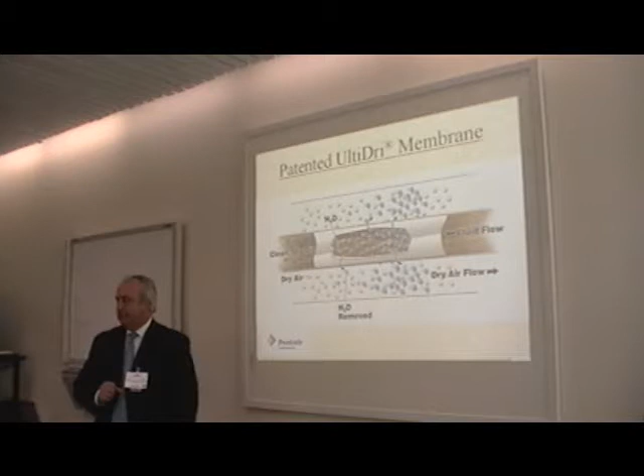We typically, the onboard filtration is between 1 and 6 micron, so you most likely have a pre-filter. Right, but essentially, if you're under a 20 micron or 50 micron particle, it's not going to hang up in there, it will go down. There is a concern that if particles start damaging the surface, you're going to interfere with the moisture exchange rates.

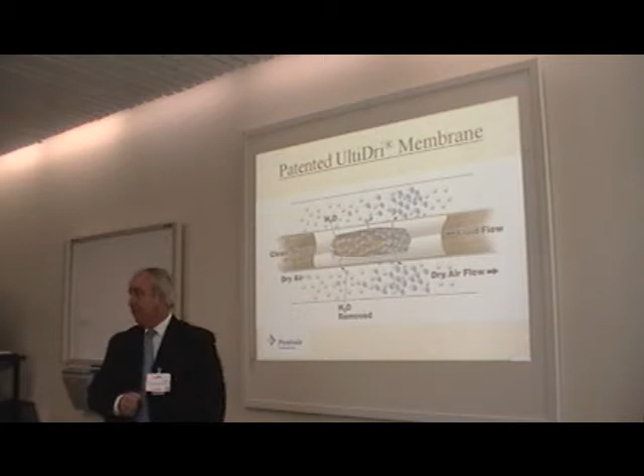That's part of why we've built a pre-filter right into the skid. We like to call it a very simple, very elegant solution that takes all the complexity of things like vacuum purifiers and centrifuges out. We've developed a very technical dehydration contactor that goes in the middle, and that drives the whole process.

So we've got a cutaway view of how the system works here. I think I already covered all these.

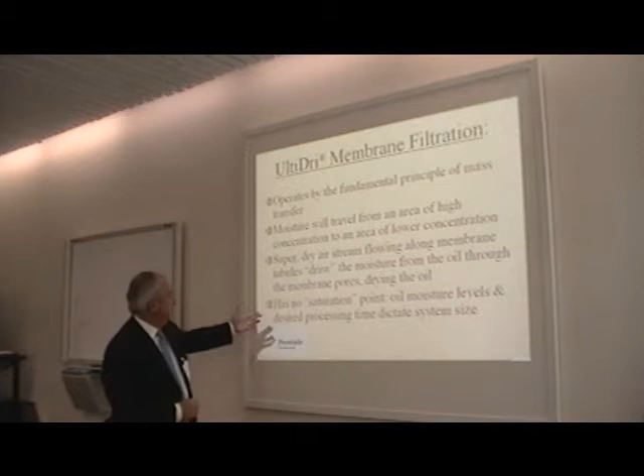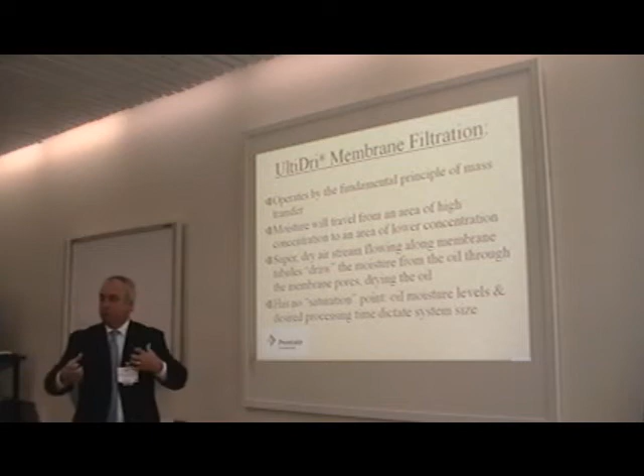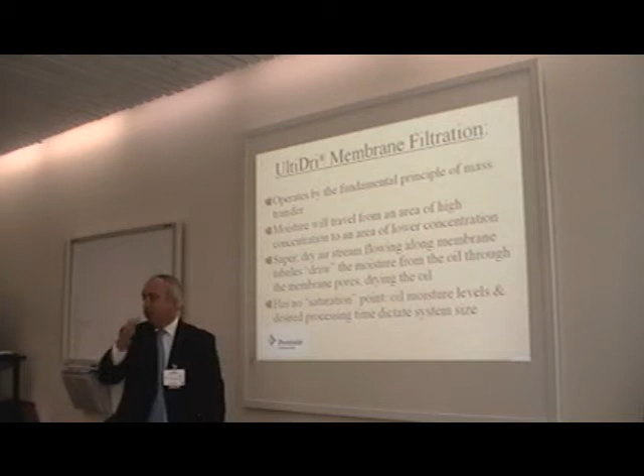One thing that's interesting, we talked about saturation point a little bit. There's no concern with that with us. Essentially, the greater the differential between the moisture in the air and the moisture in the oil, the greater the rate of exchange. That's why if you have a system that upsets periodically, like that other power plant example, every time they change load this thing will take out that moisture when it loaded up. The rate of water removal is 10 times higher than when it gets down to 100 ppm again. So it goes up with the concentration.

Diffusion, yes, that's all it is.

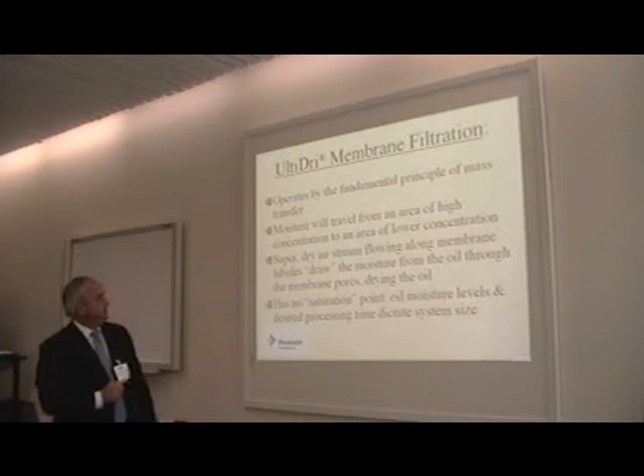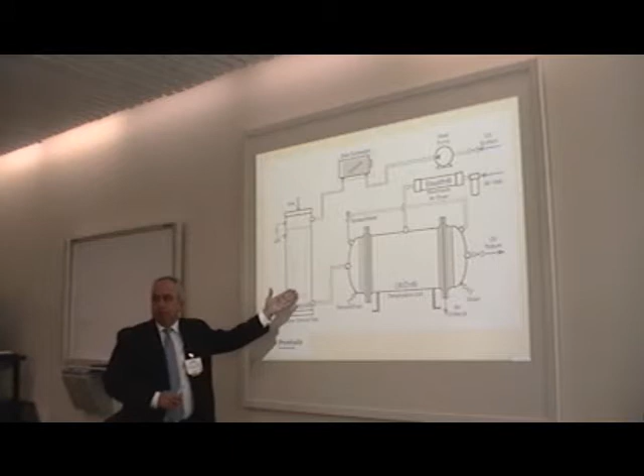First thing it sees on the skid is a particle filter, and this one, like I said, you can adjust it to meet your needs. What we recommend is the flow rate challenge on this filter is very low compared to your full flow filters. This filter's got enough surface area to handle 200 or 300 gallons a minute of oil, but we're going to give it 8 to 16 or 30 gallons a minute. Because of that, there's no load challenge on the filter. It's got what we call a low flux rate, which is flow rate per unit area.

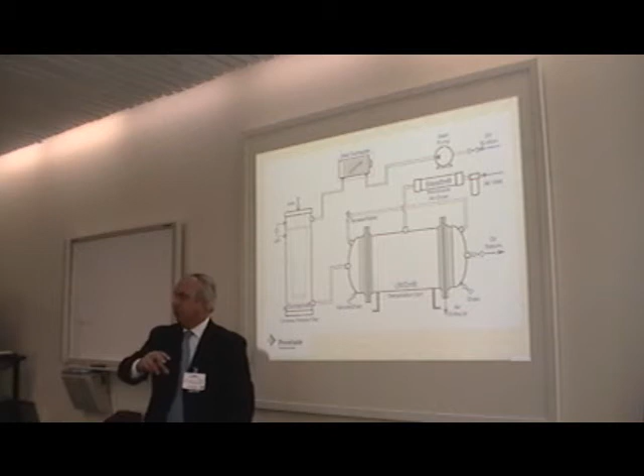Power plants, maybe 6 micron, maybe 12, we can go to that level. The paper mill in that example went to 1 micron. Why not? They can afford to do it that way. So essentially, we're removing all the solid contaminants.

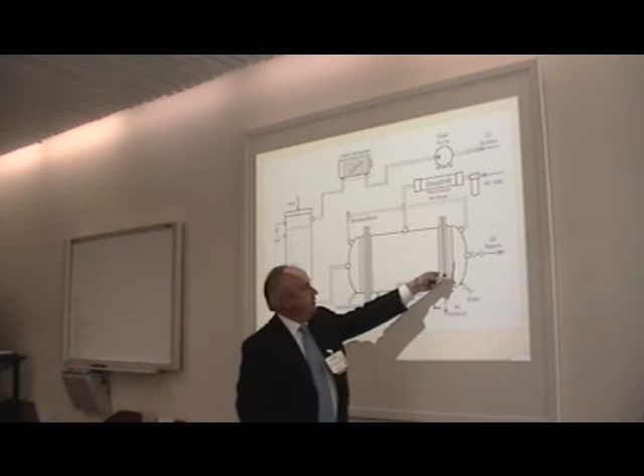The oil then flows into the dehydration housing, which is essentially a horizontal housing. It could hold either 1, 3, 7, or 14 of those modules in parallel. Depending on how much dehydration capacity or oil capacity you have, you scale it up and down as needed. The oil then basically goes in one end of the contactor, out the other, and back to the reservoir.

Then on the inlet side, we're taking plant air. We make what's called a stealth air dryer, which is essentially a hollow fiber membrane as well, a point-of-use membrane air dryer. We'll take plant air, and we try to work with process air as opposed to instrument air because of cost issues. So we'll take process air, dehydrate it down to 40 below with an air dryer, and then introduce it into the system. Since the air goes in completely dry, it actually comes out really dry.

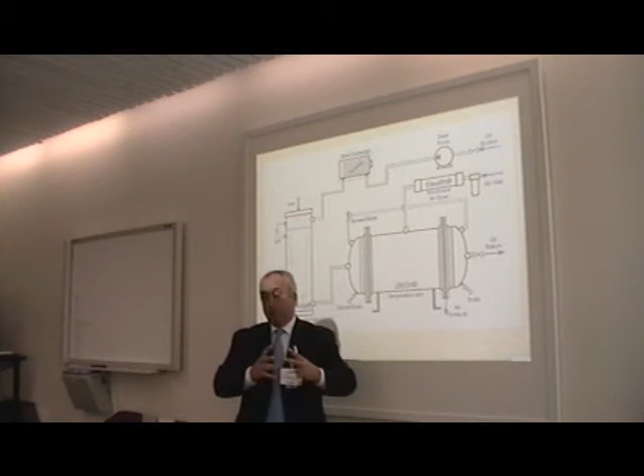It went in at a 40 below dew point. When the oil is getting cleaned down to, say, 50 parts per million water left, down to the discrete dissolved level, the amount of moisture coming out of the air is extremely low. So it comes in at -40, it might come out at -25. You can vent that right in the room. Until you get up to +60, you're not going to condense water. So it essentially is dry air, so you can just let it go.

The one thing we don't show here is built into the base of the pre-filter housing is an online moisture probe. It measures, using capacitance, the level of dissolved moisture in the oil. That gives you a local PLC reading telling you you're at 50% of saturation, 20%, or 100%, along with the temperature of the oil at any given moment.

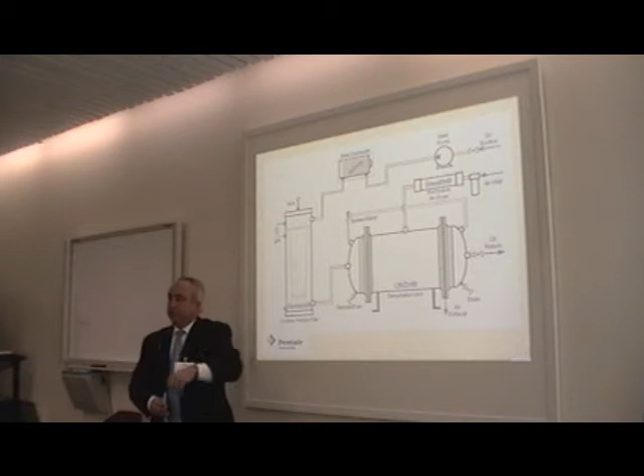We use that to help people tailor how much air they're burning. If you know you've upset the system and the meter says you're saturated, you turn up the air regulator on the inlet to full flow, letting more air through to do more dehydration. As the oil starts to dry and you get down to 50% saturation, you're wasting air, so you cut back. Get down to 20%, cut it way back. Essentially we use that to tailor how much you're using.

For that part of the monitor, how low can you go with this capacitive measurement? 10% is probably getting down towards its visibility threshold.

Would it be desirable to go lower? If there's a means of helping you get it down to really low, would that be of some benefit? I think the people in the room would answer that better than we would. Personally, I don't know how critical that is to them. The challenge is we're looking at an instrument that we haven't calibrated the curve for, for some people, to say if you're at 40% that means 80 ppm or whatever it really is. You actually have to calibrate it for every single oil, so that's a real nuisance on our end. If someone's running a really premium plant, yeah, I could see that they really want to know that.

There is a parallel technology to what I presented this morning that can measure moisture in parts per billion, in oil. That might be interesting.

I don't know if it fits into this product, but it's a fiber.

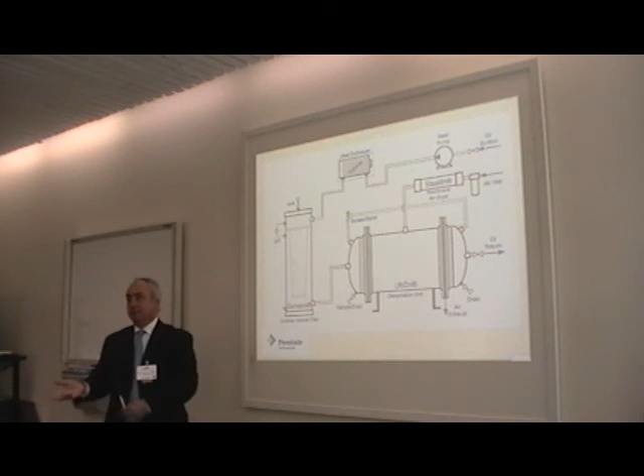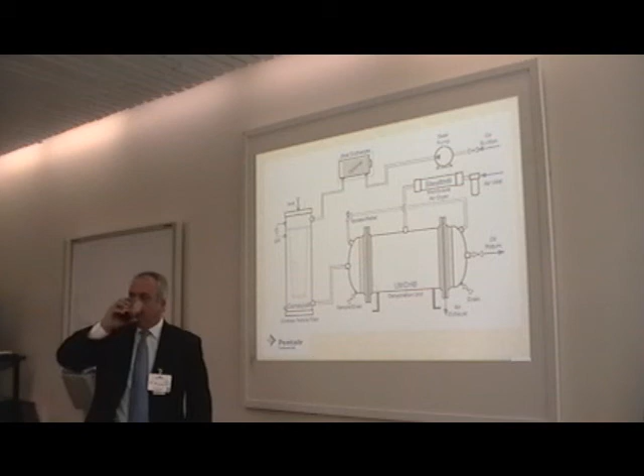Beth mentioned that reducing moisture in the oil could extend bearing life. Correct. Would there be any interest to correlate that with vibration measurement of the bearing?

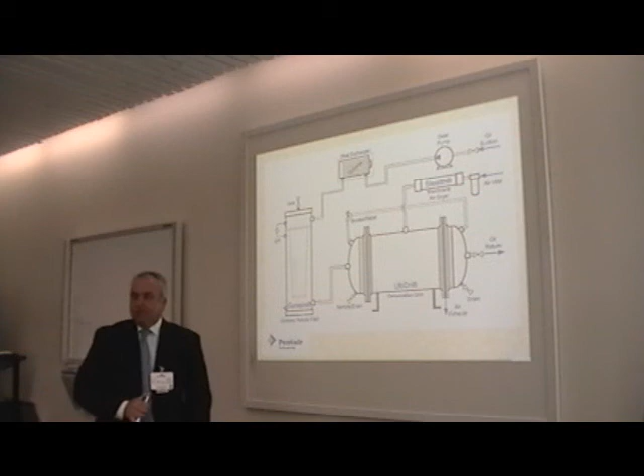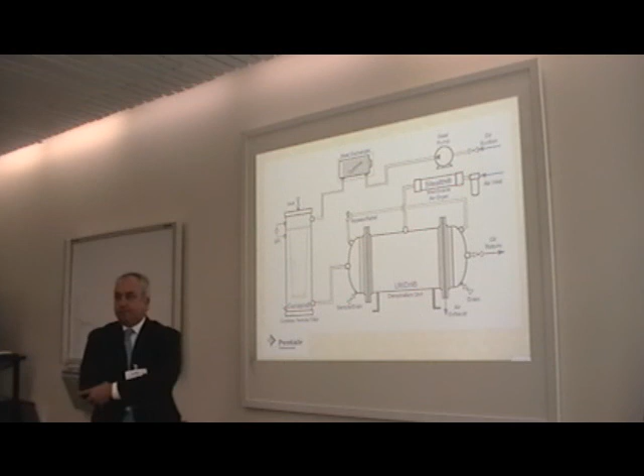Like vibration measurement gives an indication of bearing wear out. So if lower moisture can be correlated to vibration amplitude, it will be another proof that your product is doing its job.

Correct. We thus far haven't seen that, because the payback on machinery in certain industries we've been exposed to might be so extended that we haven't seen it to be an interesting point yet. They haven't drilled down to that because the ROIs are multi-year. I think right now, maybe the case for you as well, people are always looking at a 5-year or less ROI. So unless they have a really catastrophic problem, I'm not so sure how pertinent that is.

But it's a very good point for people who have extremely expensive equipment doing longevity studies. It makes a lot of sense. The challenge is on the turbine side, on a steam turbine, bearing life is years and years and years, so it's hard to get a quick read.

Going back — don't get off of that, don't move. How much? I was looking at that thing and I wasn't paying attention to what you said.

How much volume is — how much flow rate does this take? The oil flow, set?